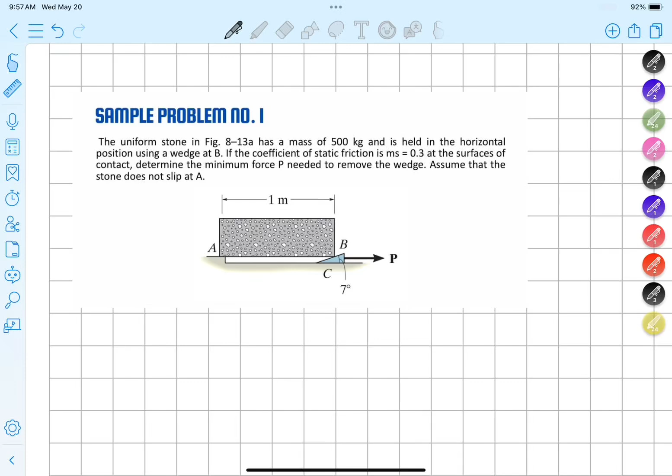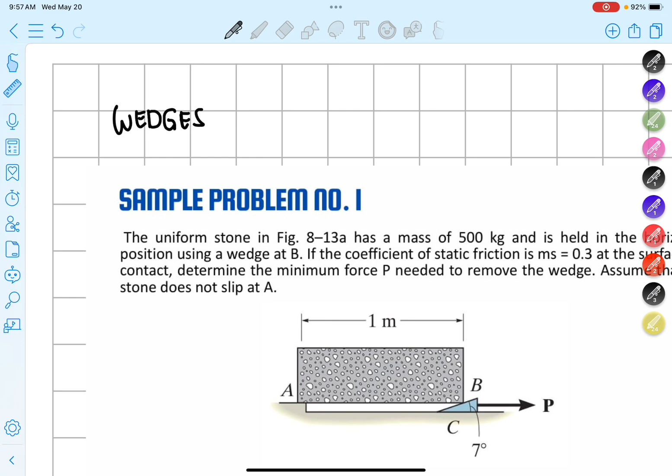Okay, so huwag kang magtataka kasi this is sample problem number 1. Sample problem na nilagay ko kasi nga this is part ng wedges naman. So there are types guys, although puro equilibrium equations lang talaga kasi gagamitin natin, aside from that wala naman ng iba. So medyo madali lang talaga yung mga problems.

So in this case guys, ang hinahanap sa atin, the uniform stone in the figure has mass of 500 kg, is held in a horizontal position using a wedge at B if the coefficient of static friction is mu s is equal to 0.3 at the surface at the contact. Determine the minimum force P needed to remove the wedge. Assume that the stone does not slip at A.

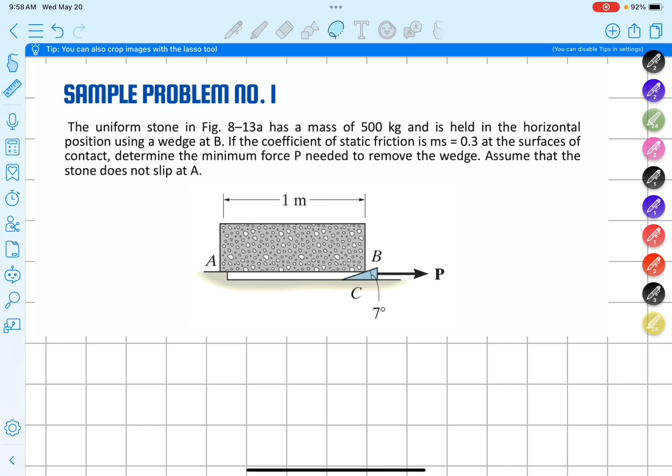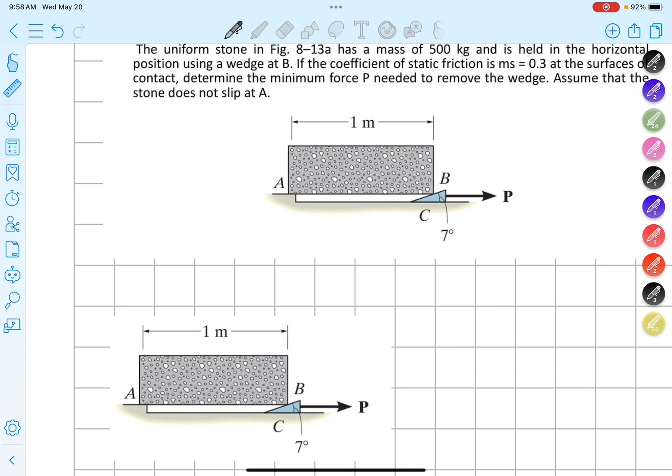O so, nakafix daw at A. Okay, basically, i-copy siguro natin to para mas maging maliwanag lang yung ating free body diagram. With that, okay, ayan.

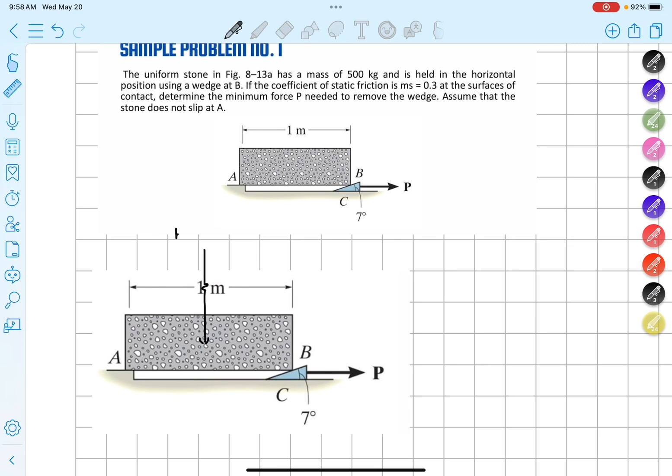Okay, so sabi, we have 500 kilogram. 500 kilogram daw yung ating weight. So if we have 500 kilogram na weight, ilan yan in force? Mass pala yan. Ilan to ngayon? 500 times 9.81, this is equal to 4905.

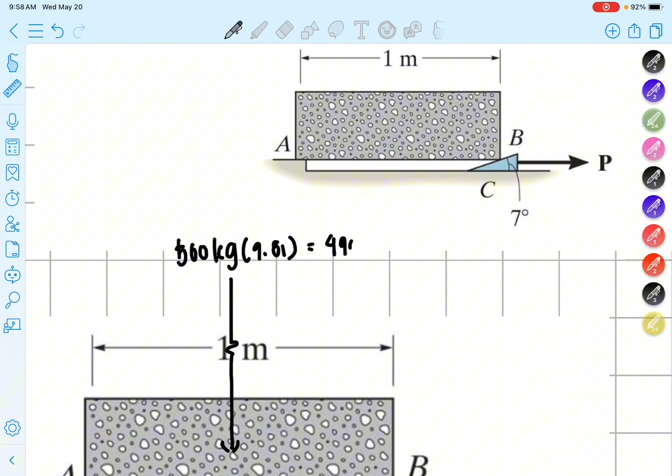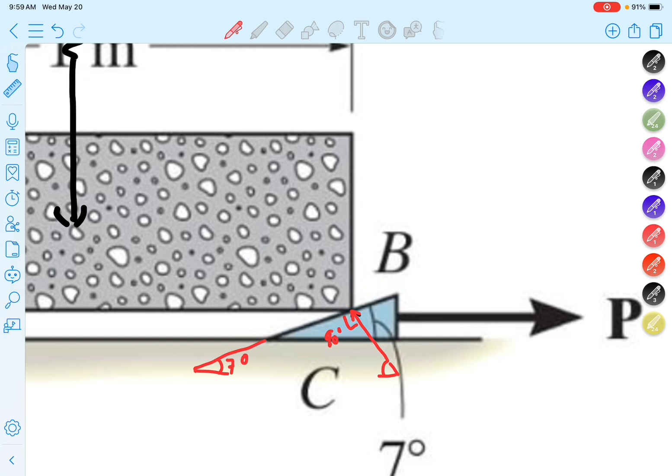Okay, para lang tong method of members. Ngayon, in this case guys, okay, this is 7 degrees. Ngayon, alam natin that normal force is always acting perpendicular to the surface. Tama, so ibig sabihin, sabihin, ganyan, di ba ito yung 7 degrees natin? Ayan, 7 degrees, so this will be 7 degrees. So ilan to ngayon? Kasi ito 90 degrees yan, sure eh. It's perpendicular. Ilan to ngayon? So 180 minus 90 minus 7, this is equal to 83 degrees ngayon. So this is equal to 83 degrees.

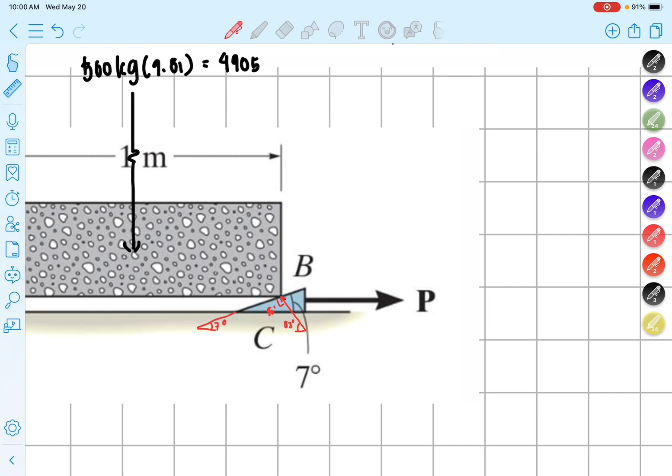Tama, so yan lang naman yun. Ngayon, ang mangyayari sa atin dyan guys is that magkakaroon tayo ng frictional force dyan. Pag hinila mo ng force P, okay, doon muna pala tayo sa may weight. Wala pa tayo sa force P, mamaya tayo doon. Kung titingnan natin guys, okay, pagka dumagan si force, si force na 4905 Newton downward, ang tendency di ba gagalaw to pag ganun. Tama, diyan muna tayo, wala pa tayo sa force P. Nandun lang tayo sa may block as is, due to weight muna tayo, di ba gagalaw siya na ganyan? Okay, ito yung impending motion niya.

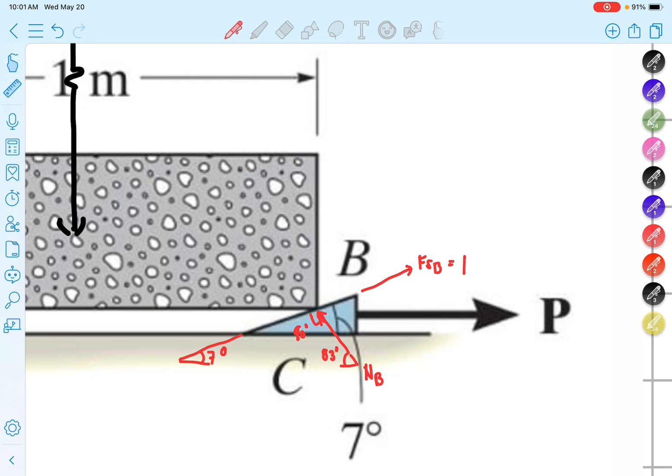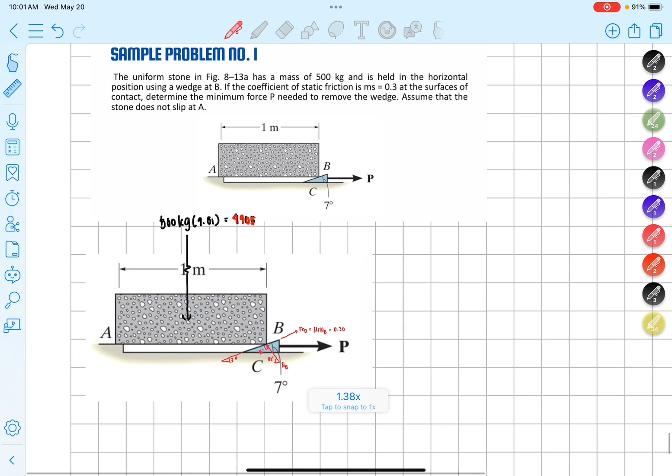Therefore, yung frictional force natin is mag-a-act opposite to that. Okay, so ibig sabihin, gagalaw to, yung natin, magkakaroon tayo dito ng frictional force B, Fs at B. Tama, so ganyan guys yung mangyayari sa atin ngayon. In this case, tanggalin ko to kasi pinakita ko lang na may impending motion due to weight. Ito guys yung normal force natin, this will be N, ang tag ito, N B. Nagkakaintindihan? Yung frictional force B natin, di ba this is mu S N, which is mu S N B kasi nasa B tayo, which is equal to 0.30. Mu S natin daw at all surfaces 0.30 NB.

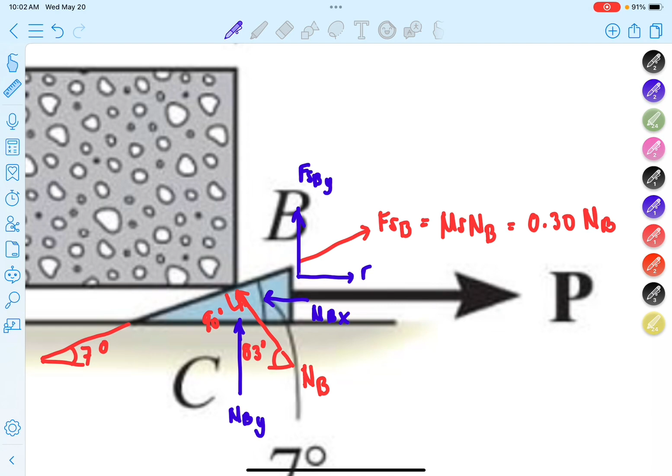Ngayon, ang alam natin guys that yung NB natin na to is mag-a-act into two components. So this is NBX, at NBY. Ito ay NBX, tama, papunta naman doon. Si ano naman guys, si FSB natin is that papunta doon, we have FSBY, and then we have papunta doon, we have FSBX. Okay, so in this case, para ma-identify natin yung mga forces guys, okay, mag-take tayo ng summation, moment at A.

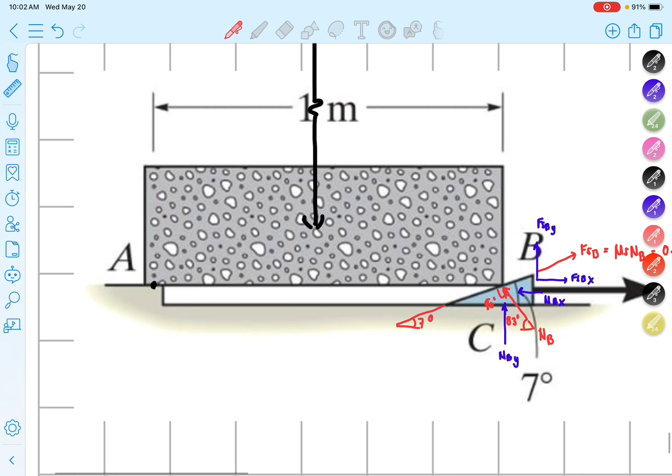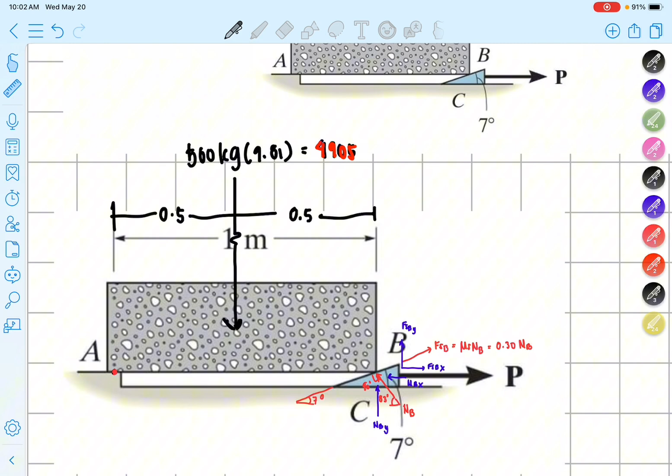Pwede kang mag-take ng moment dyan para mapalitaw mo yung moment at A. So we have the summation moment at A is equal to 0, considering counterclockwise positive. So 0 is equal to etong 4905 na yan, by the way that's ilang 1 meter, so ito ay 0.5 and 0.5, tama? Okay, so kung if that's the case guys, the 4905 we have so iikot ng clockwise yan. So negative 4905, ang moment arm niya will be 0.5.

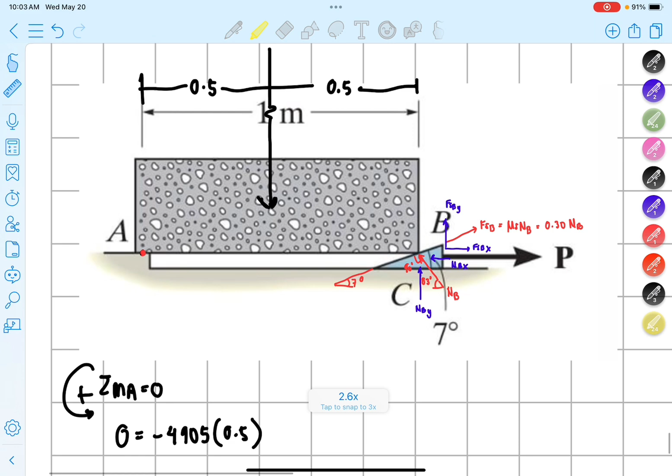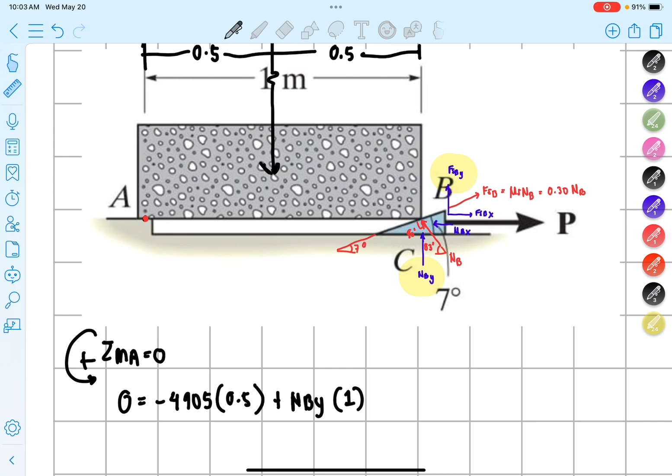Ngayon naman, check naman natin itong NBY. So we have plus NBY multiplied by ilan yan. So from A, this is 1 meter, tama. Okay? And then, plus, yung NBX na to, saka yung FSBX natin na yan, magkakaroon ba ng moment yan? Hindi, kasi magkapass through yan sa point A, tama. So, NBY saka FSBY lang yon, or the frictional force. Okay? So, plus, again, plus ulit yan, FSBY multiplied by 1.

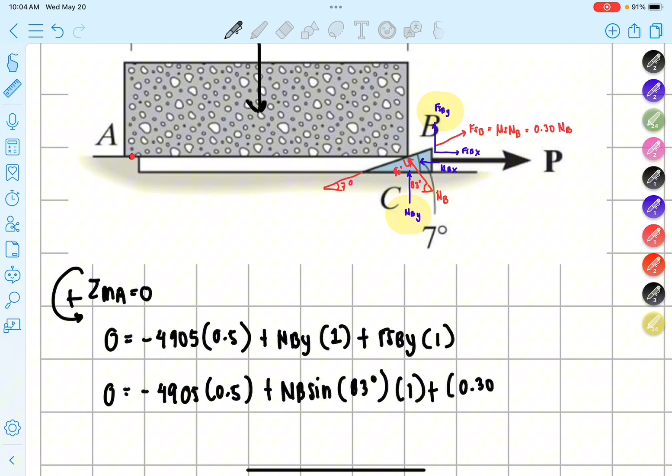To further simplify, we have negative 4905 multiplied by 0.5 plus, ano ba yung NBY natin? So, that's NB, cosine of... wait lang, parang meron tayo mali. That's NB sine of 83 degrees multiplied by 1 plus, di ba yung FSB natin is 0.30 NB, 0.30 NB, that's yung FSB natin. Kaso mag FSBY nga yan, we have sine of 7 degrees. Okay?

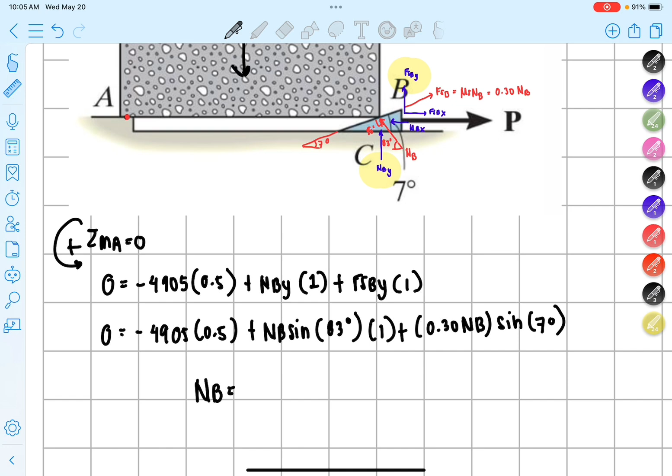Nagkakaintindihan? So, ibig sabihin, yung NB natin is equal to 0 is equal to negative 4905 times 0.5 plus NB sine of 83 degrees multiplied by 1 plus 0.30 ng NB sine of 7 degrees. This is equal to, for NB, we have I believe this is 2383.1. Ang unit natin is in Newton.

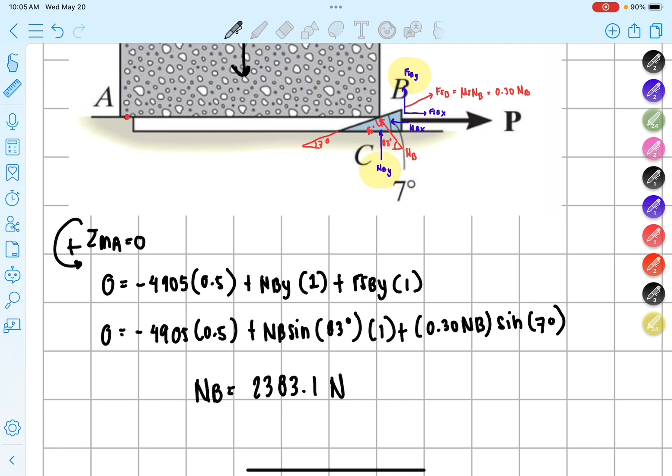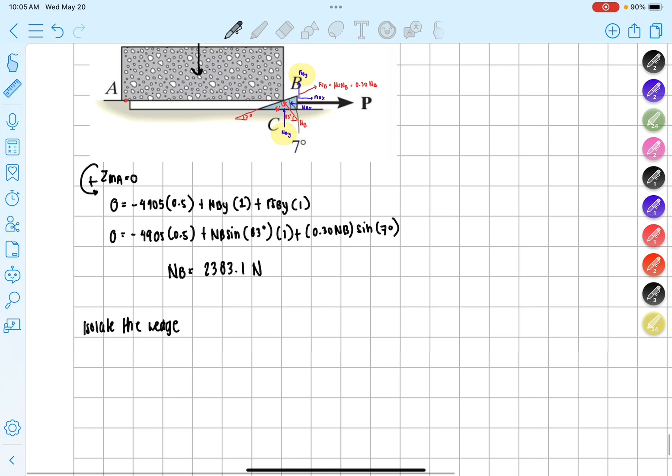So that's NB. Okay, hindi pa naman yun yung hinahanap natin ngayon. Ngayon naman, i-isolate natin ngayon, guys, yung ating wedge. Okay, isolate the wedge.

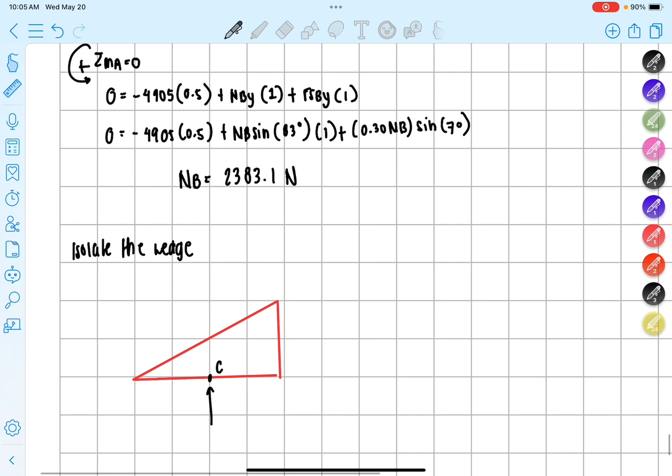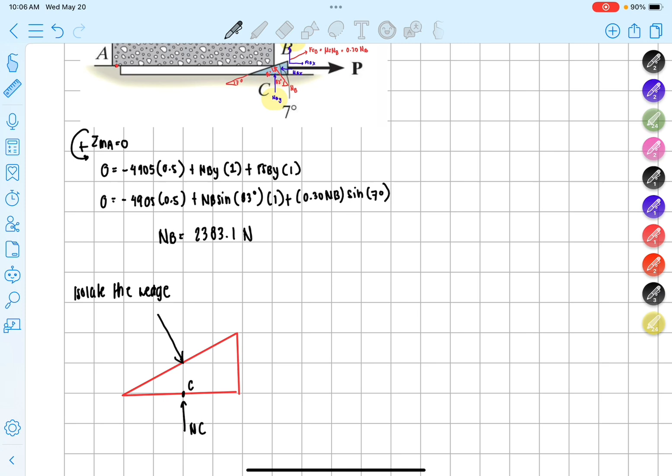Okay, so ibig sabihin, i-isolate natin yung wedge. Ito yung ating wedge. Okay, alam natin, guys, that the normal, magkakaroon tayo ngayon, this is point C na, di ba? This is point C. Ngayon, magkakaroon ka dyan ng normal force at C. Tama? Tapos, yung normal force at B mo is as a contact surface, pero pag ganyan naman ngayon yan. Pag ganyan na yan. Maliwanag. So, ibig sabihin, this is also 83 degrees.

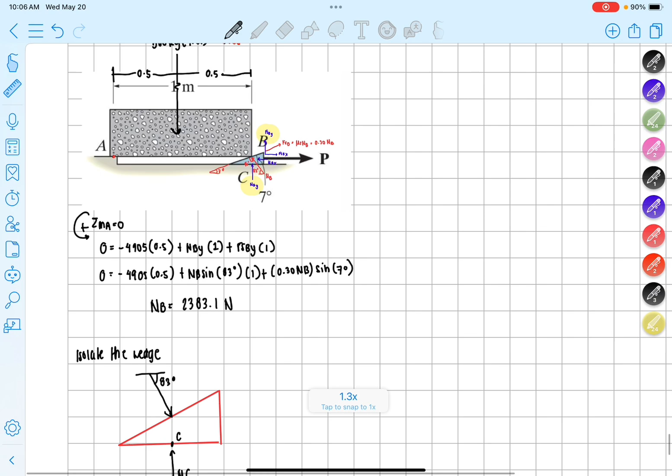Okay? And ngayon, instead na, siba transfer of loading tayo. Sa kanina, papuntang ganun yung ating FSB natin. Ngayon naman, lilipat siya dito, which is, eto na ngayon yung ating FSB natin. So, this is NB. Itong portion na to is NB. Ito ngayon is ating FSB. And still, guys, this is 7 degrees. Okay, sabihin, 7 degrees pa rin yung ano niya.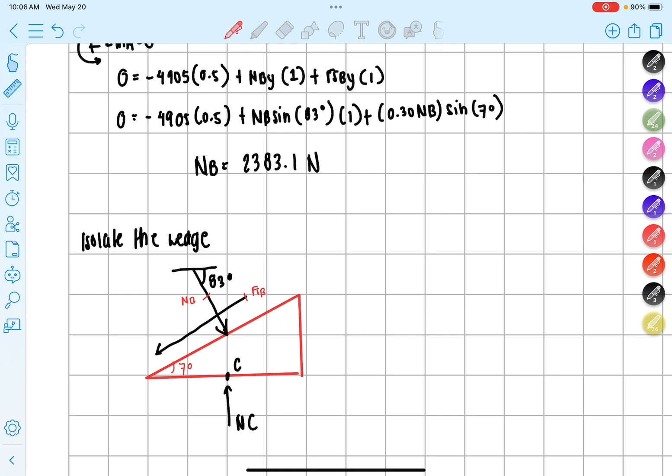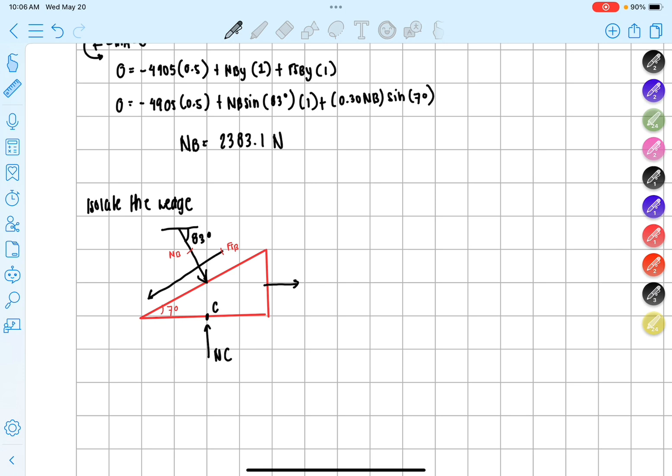So now, dito na ngayon papasok si force P. Ayan na, lumitaw na siya. Okay? So, paano gagawin natin ngayon dyan? Una, i-identify muna natin, of course, NC. Okay? By taking the summation forces, this is P, di ba? By taking the summation forces, okay, let's say, vertical is equal to 0. So, 0 is equal to, magiging ano yan?

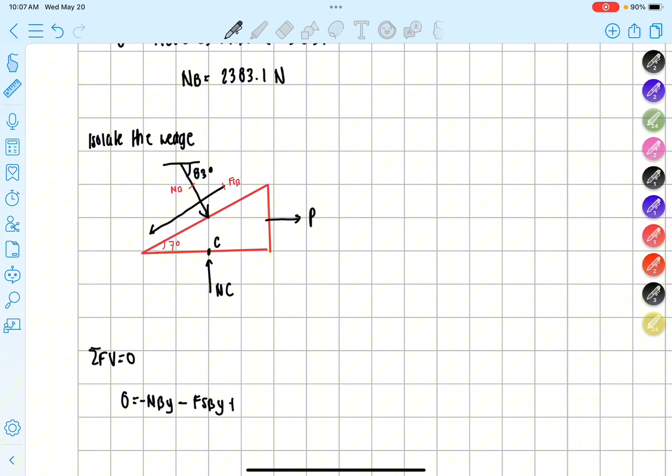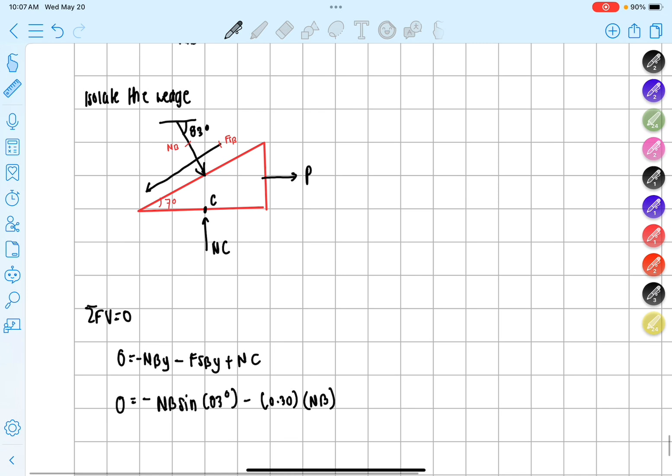NB, di ba makaka-create na naman ng mga yan? Magiging NBY, okay, negative NBY minus FSBY plus NC. So, ibig sabihin, 0 is equal to negative NB sine of 83 degrees minus 0.30 ng NB natin. NB, okay, sine of 7 degrees, okay, plus the NC.

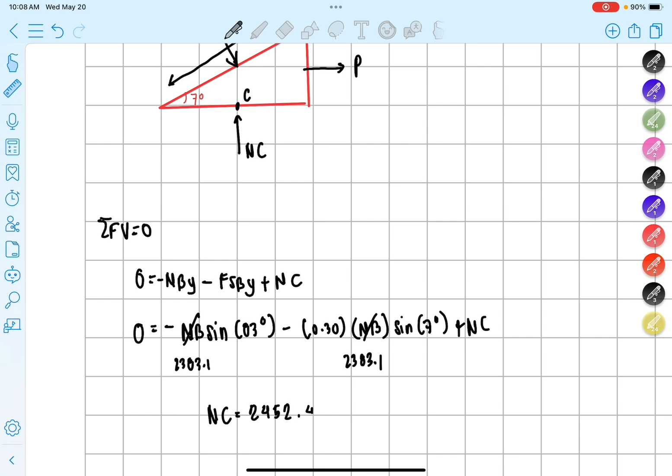So, ang NB natin is given by 2383.1. So, this is 2383.1. Also, this is 2383.1. So, 0 is equal to negative 2383.1 sine of 83 minus 0.30, 2383.1 sine of 7 plus NC. Ang lilitaw sa atin dito should be, dapat ang lilitaw sa atin dito is equal to, for NC, this is equal to 2452.465 Newton. Okay, so ayun, nakuha na natin si NC.

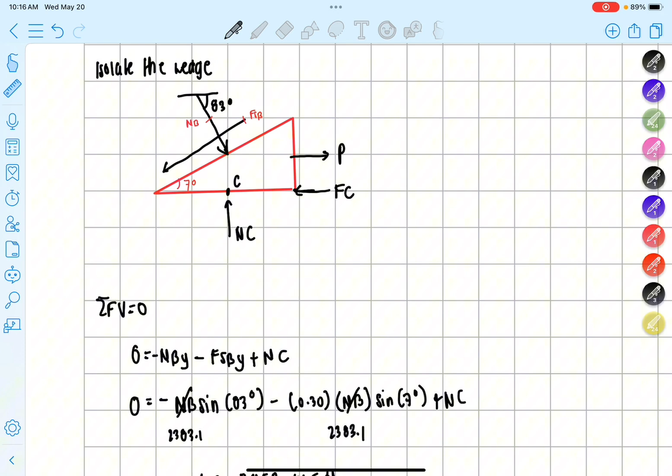However, meron pa pala akong nakalimutan dyan, okay? Kasi itong surface natin na to is aandar punta doon, di ba? Ngayon, yung contact surface naman nung ating wedge papunta dun sa may pinaka-floor mismo, ayan. So, paano ngayon yung magiging frictional force natin? So, magkakaroon ng FC dito yan, di ba? Which is equal to 0.3 pa rin ng NC naman.

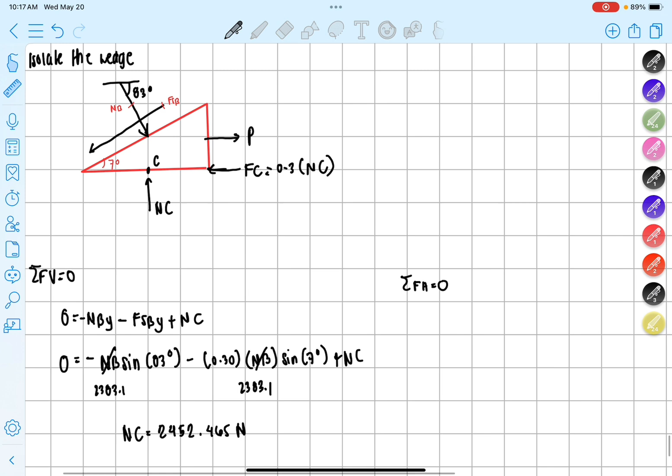Okay, so guys, magpo-proceed na tayo sa summation ng forces along the horizontal to determine the value of P. So, mangyayari dyan, maging equation natin is 0 is equal to NBX, tama, NBX minus FSBX, okay, minus FSC or FSC lang, kasi yun lang naman yun, kasi wala naman siya component, FSC, okay, plus P. So, 0 natin is equal to 2383.1 cosine of 83 degrees.

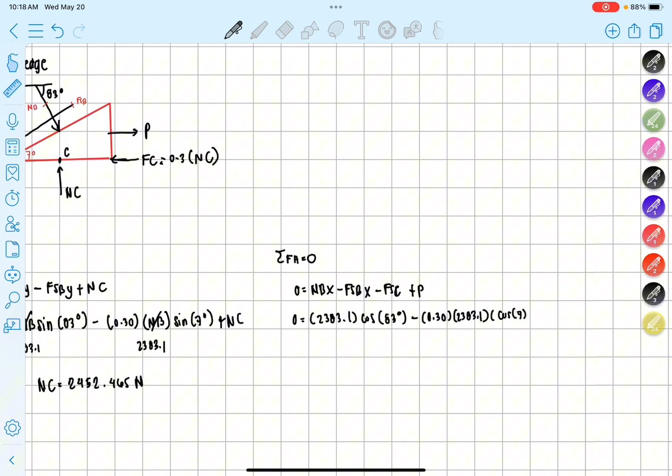Tama. Minus yung FSB natin is 0.3 ng NB, 2383.1, pero dadagdagan mo pa yan ng cosine of 7. Okay. And para naman sa FSC, minus 0.3 ulit. Ang NC na nakuha natin is 2452.465. So, okay na. And then, plus P.

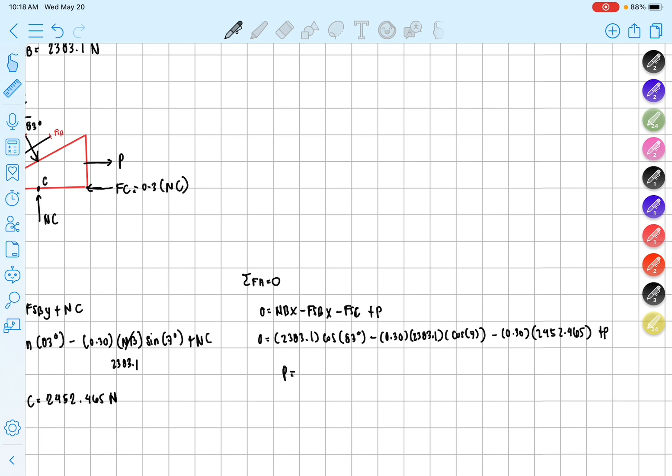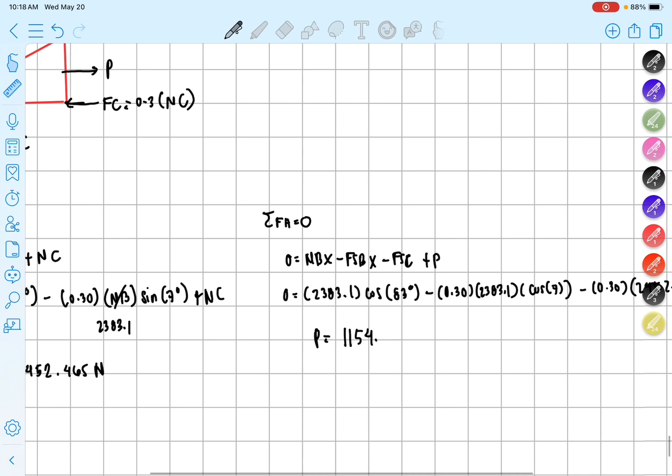So, makuha natin that the value of P is equal to 2383.1 cosine of 83 minus 0.30, 2383.1 cosine of 7 minus 0.30, 2452.465 plus P. Ang makukuha natin na value dito, this will be equal to, we're going to calculate this. Ang makukuha natin na sagot ay 1154.9. So, this is equal to 1154.9 Newton. So, this will be our final answer. Okay.